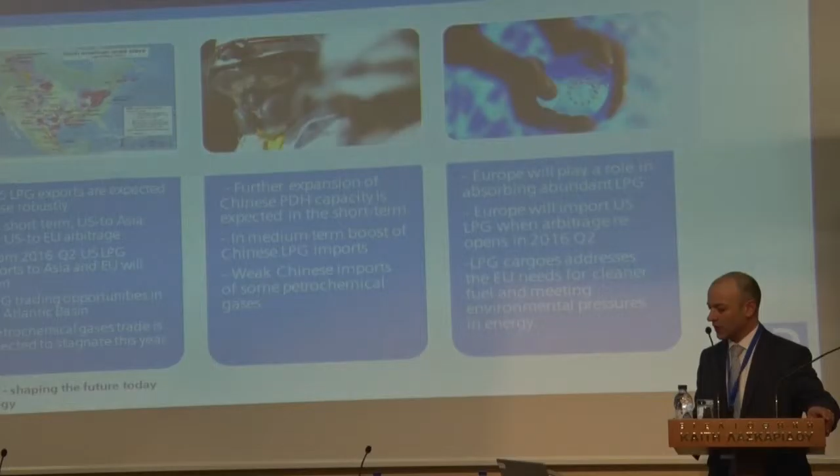There will be supply for more cargoes. This is driven very much by US. There is also the demand that has to absorb, which this slide looks like the supply and the demand follows each other. So that means that there's a lot of opportunities to utilize what some people consider as an abundant source of energy. The drivers that form this forecast are kind of like regionally segregated.

For one, we have US becoming an LPG exporter. At the same time, US has had its own demand needs. Therefore, we didn't see a huge boost of US cargoes to Asia and Europe. There will be opportunities in trading LPG in the Atlantic Basin, and one of the markets that the LPG is trying to penetrate is petrochemical industries.

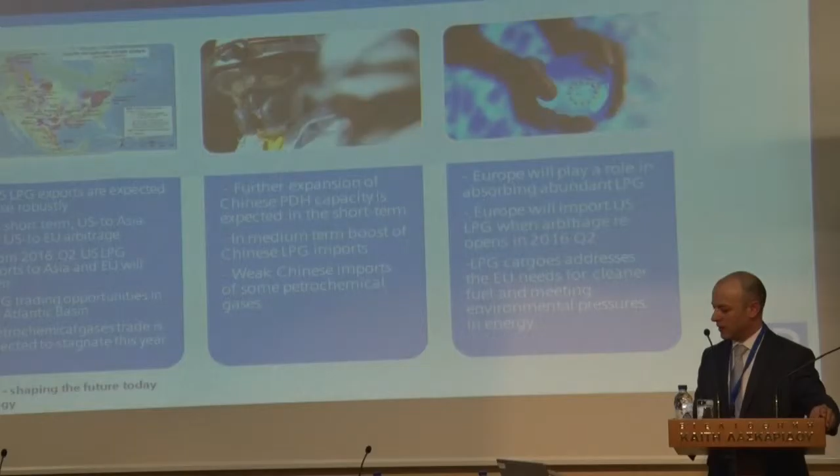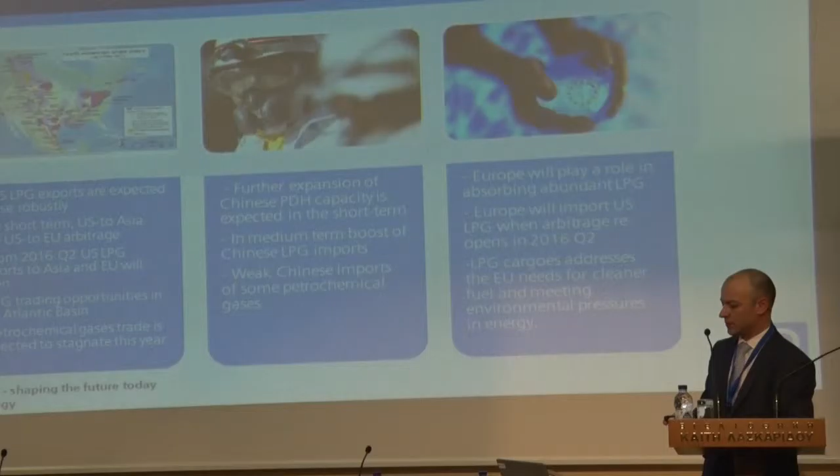In terms of Asia, we have seen in the last 2 years, and it's still moving forward, increasing demand for LPG importing. There is also entering into the petrochemical gases, specifically in China. And Europe is going to play also a role, as we've seen before, that the use of LPG is quite wide. It becomes wider and has a lot of practical utilization on the power grid, or at least as a source of energy in the houses.

Specifically to the shipping, there is a significant amount of order book with deliveries in 2016 and 2017, which accounts to 93% of the total LPG order book. After that, you can see there's a vast drop of LPG deliveries. Primarily, focus of the LPGs for 2016 and 2017 is the large LPG carriers above 60k. Most of them are also usually called very large gas carriers, VLGCs.

Regarding the new building capacity, we see that most of it is focused in Asia. We have South Korea, Japan, and China leading with 51.3% of the global LPG order book. Regarding the growth of LPG fleet, because we have increased supply, we have increased demand, it is expected to grow by 41.2% from now until 2025.

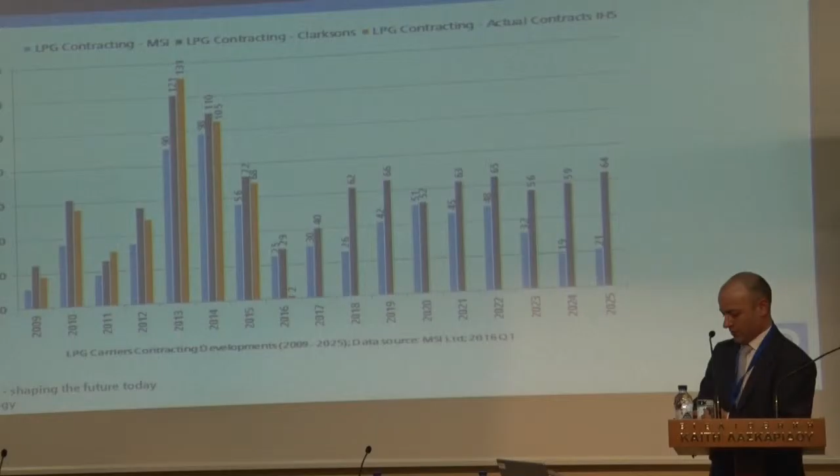All these market analysts are trying to demonstrate that in the past they have been very successful. I can tell you for sure that if you go back a few years of the forecast, they were wrong, even in 2015 and 2014. And also they forecast different contracting activities for the next 10 years.

The one in dark blue is from Clarksons, which you see a large number of LPG contracting activity for the next 10 years, while MSI is a little bit more conservative. But nevertheless, it looks like it's going to be healthy activities both for shipbuilders and ship owners, specifically driven by the supply and demand for LPG.

And since this is a Lloyd's Register event, allow me to position LR where it stands based on the data other market analysts hold, which brings us into a market share of 28.2% of the whole global fleet. And specifically on the LPG global order book, we hold 32%. So this is the market.

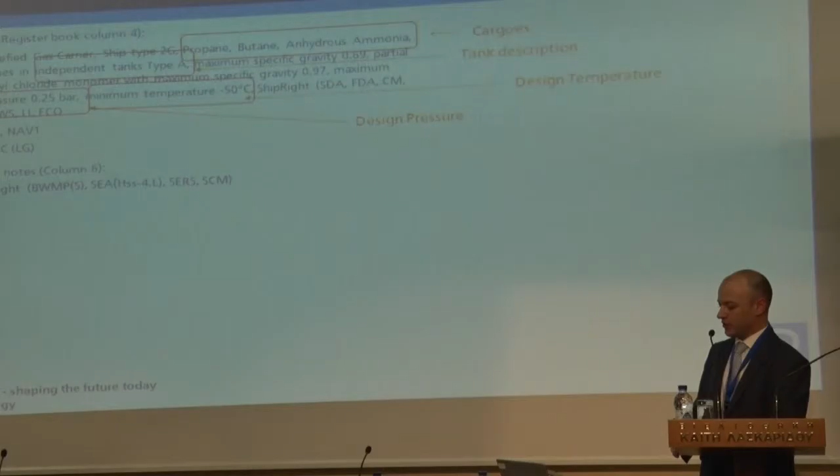So here in this slide, just an example of a Type A LPG carrier, how it is classed with the Lloyd's Register class notations. And I highlighted specific words which not only affect how the vessel operates, but also affect the design of the vessel. So the description of the tank, what is the design pressure, the design temperature, and also about refrigerated cargo installations and equipment.

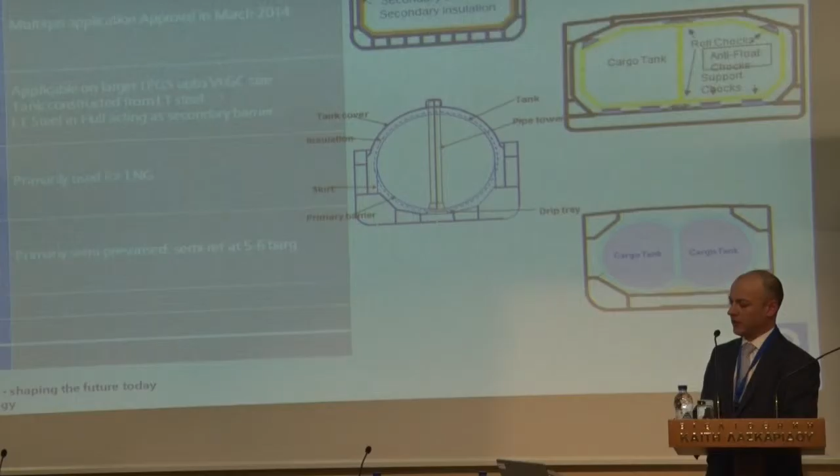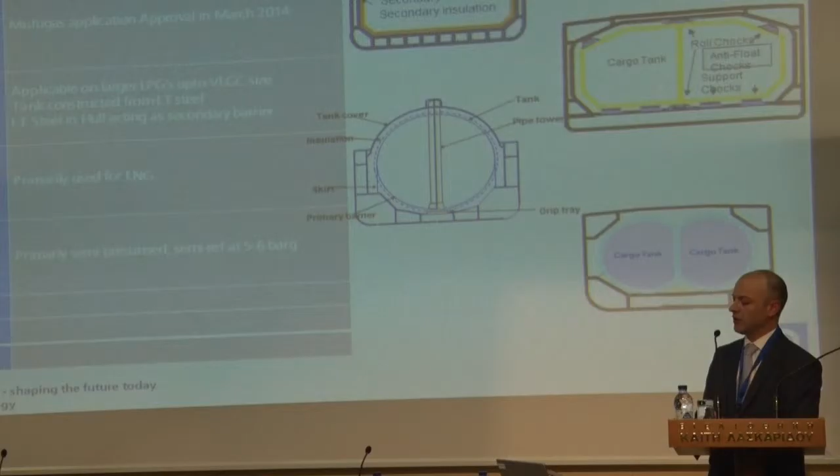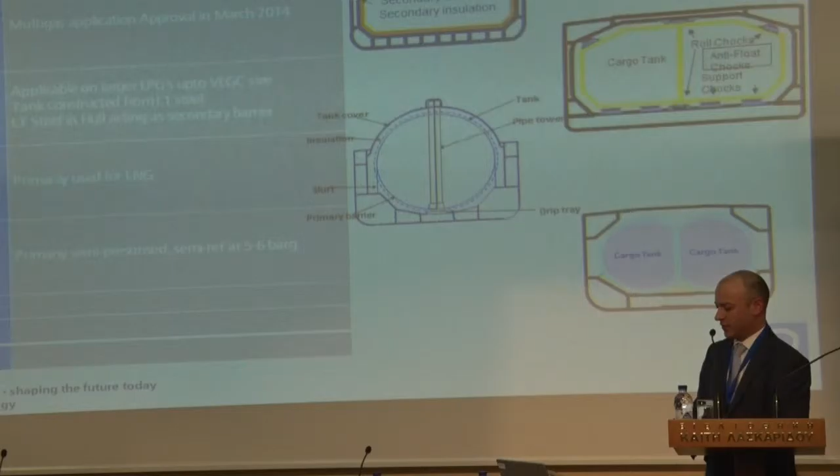So the dominant LPG carrier designs is that of membrane system, which actually have received an approval of the main, let's say, products, which is the NO family and the Mark III family, which primarily has been used on LNGs and recently on VLGCs. Obviously, I have to update my slide, Mr. Colson, and introduce a nice image of your new containment system for LPGs that you presented today for us.

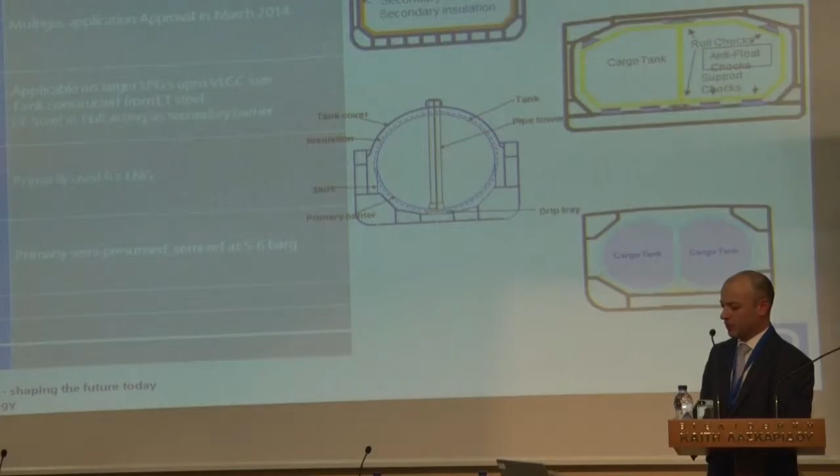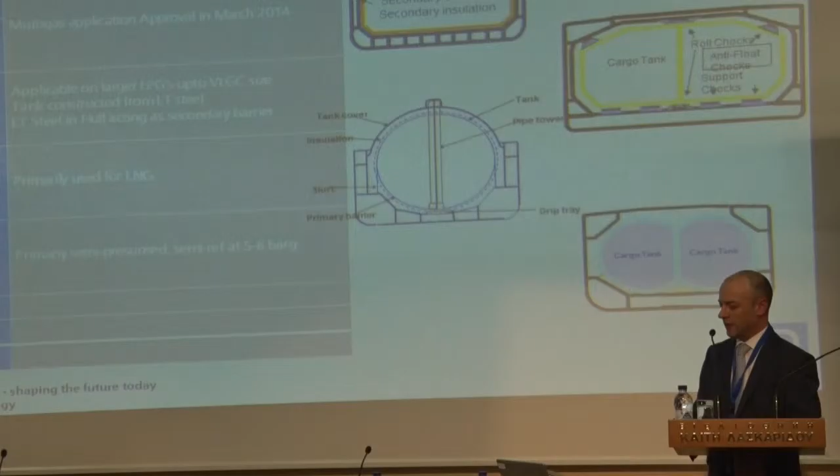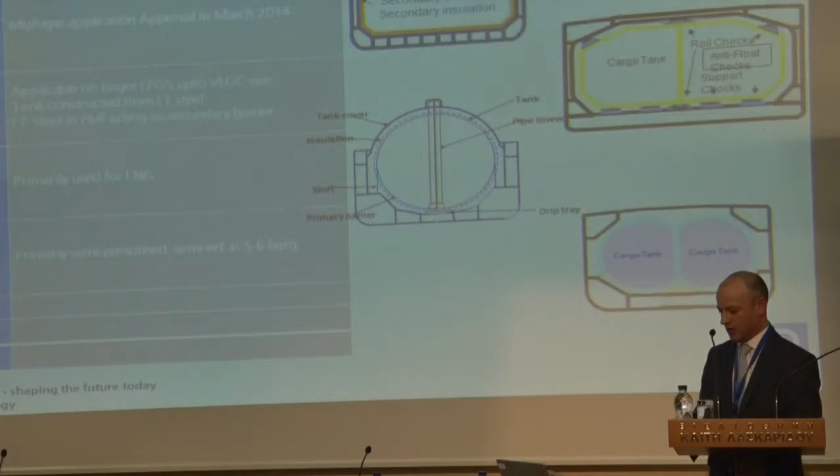For large LPG carriers, we are talking about Type A, which is an independent tank. Type B tanks have been used in the past for LPG cargoes, but they have dominated the LNG market for a number of decades. And then for smaller LPG carriers, Type C is dominating, which is semi-pressurized at 5 to 6 bar G and semi-refrigerated.

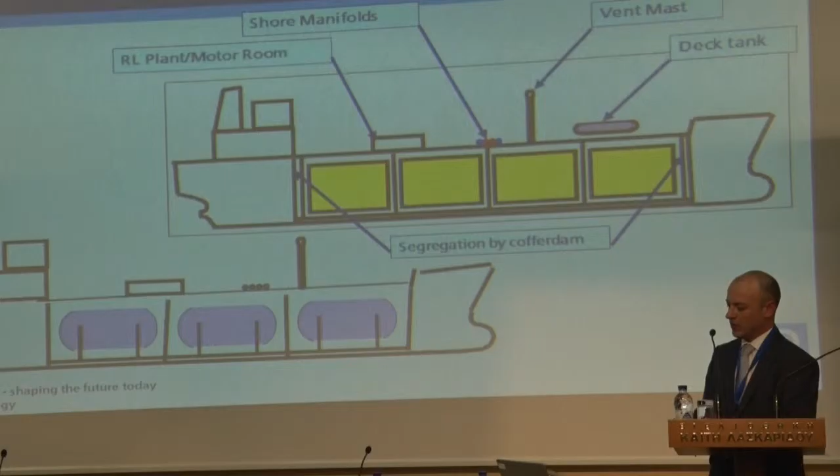The arrangement of the longitudinal profile of an LPG carrier between a Type A and Type C looks like that. There's not a lot of differences, except that in case of a Type A, a segregation from the engine room is required by the IGC Code.

How is the principal operation of an LPG carrier? It's not that complicated. Basically, the pumps are installed inside the cargo tanks, and then using booster pumps normally go through a cargo heater or straight to the manifold.

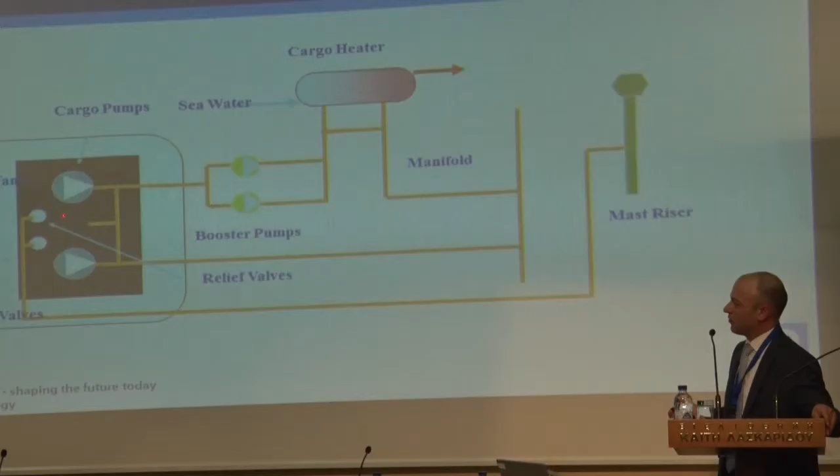Because the LPG is liquid in cryogenic conditions, obviously we have vapor generated inside the tanks, increasing the pressure of the tank, and in case of an overpressure, there are safety valves, and then the gas can go through the mast riser. It's basically a means of safety with the cargo safe design.

When the LPG becomes gas, obviously you lose cargo, and obviously it's valuable and it costs money. Therefore, the LPGs are equipped with refrigeration plants. The schematics of the common refrigerating plants is of direct type or cascade type. Of course, this is just a very outline description. We have seen in the morning further improvements that have been done for more efficient ways of handling the cargo.

Another feature of the LPG carriers, and general gas carriers, but specifically on LPGs, is the inert gas system, in order to ensure that there is no oxygen inside the cargo tanks, to minimize or to eliminate the risk of any explosion or fire.

And lastly, it is important to understand and classify the hazardous areas of an LPG carrier, slightly different between Type A and Type C, because this affects a lot of the design and the construction of the electrical equipment on board an LPG carrier.